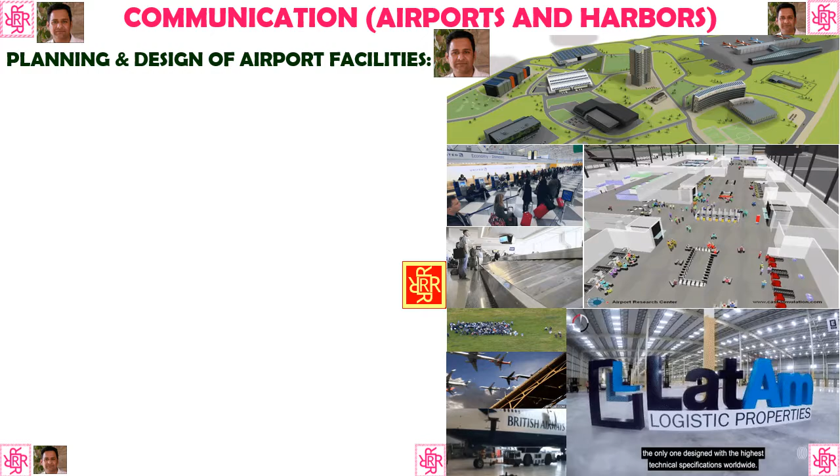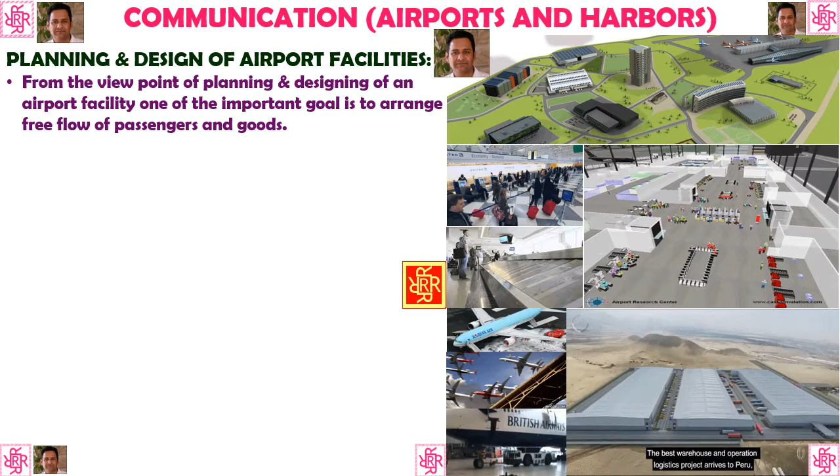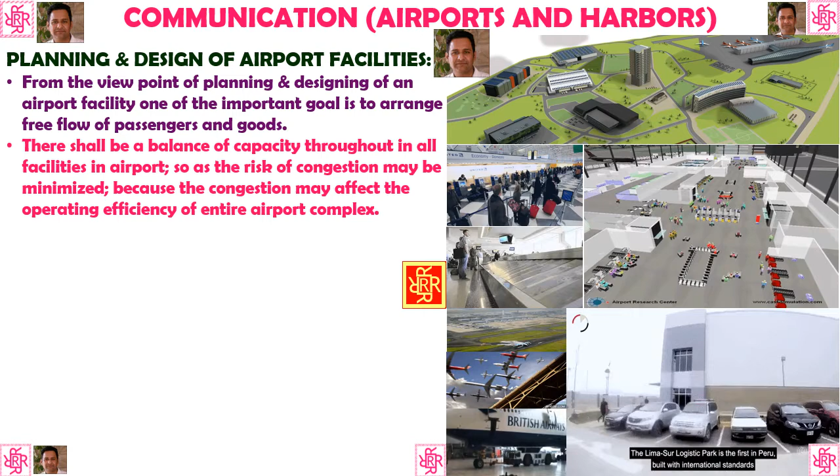Planning and design of airport facilities, how an airport is designed. From the viewpoint of planning and designing an airport facility, one of the important goals is to arrange the free flow of passengers and goods. There shall be a balance of capacity throughout all facilities in the airport, so that the risk of congestion may be minimized, because congestion may affect the operating efficiency of the entire airport complex. There are two types of functional areas within an airport: operational areas, known as airside areas, and terminal areas, or landside areas.

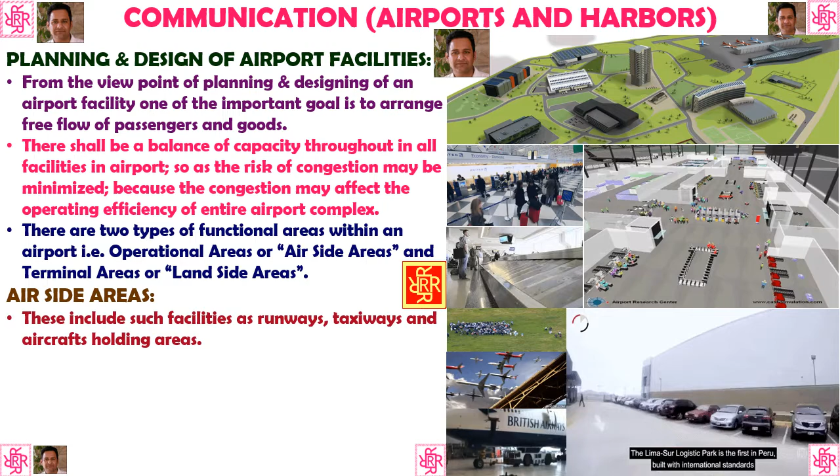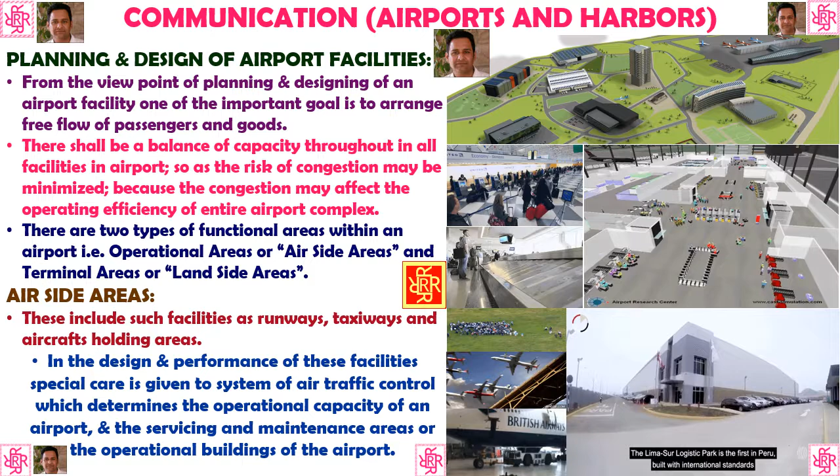What are airside areas? As we discussed in the previous figure, these include facilities such as runways, taxiways, and aircraft holding areas. In the design and performance of these facilities, special care is given to the system of air traffic control, which determines the operational capacity of an airport, and the servicing and maintenance areas or the operational buildings of the airport.

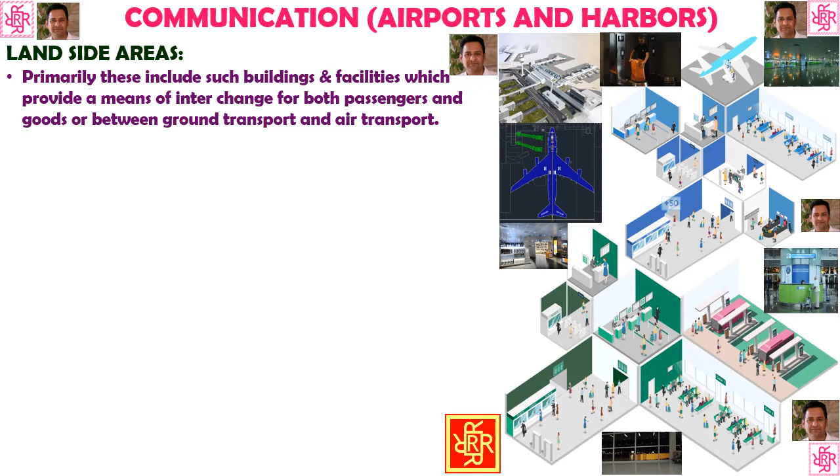Then come landside areas. Primarily, these include buildings and facilities which provide the means of interchange for both passengers and goods between ground transport and air transport. The design concept of landside areas evolved from simple low-capacity terminal buildings to high-capacity layouts, which are popularly termed finger terminals.

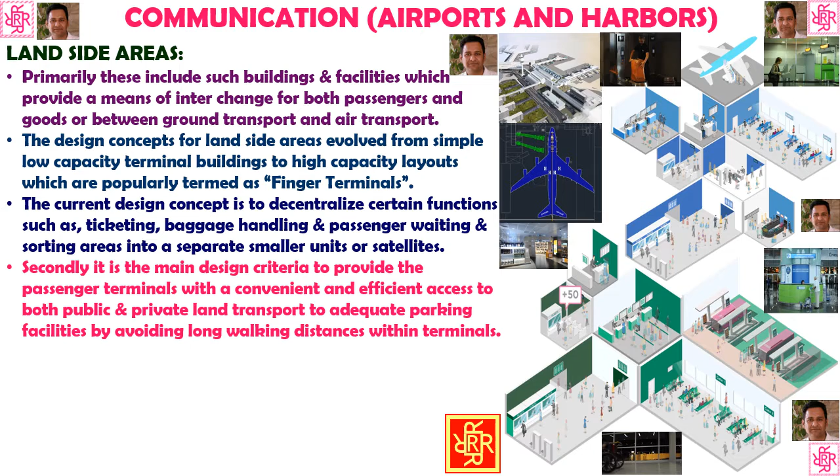The current design concept is to decentralize certain functions such as ticketing, baggage handling, and passenger waiting and sorting areas into separate smaller units, or the satellites. Secondly, it is the main design criteria to provide the passenger terminals with convenient and efficient access to both public and private land transport and to adequate parking facilities, by avoiding long walking distances within terminals.

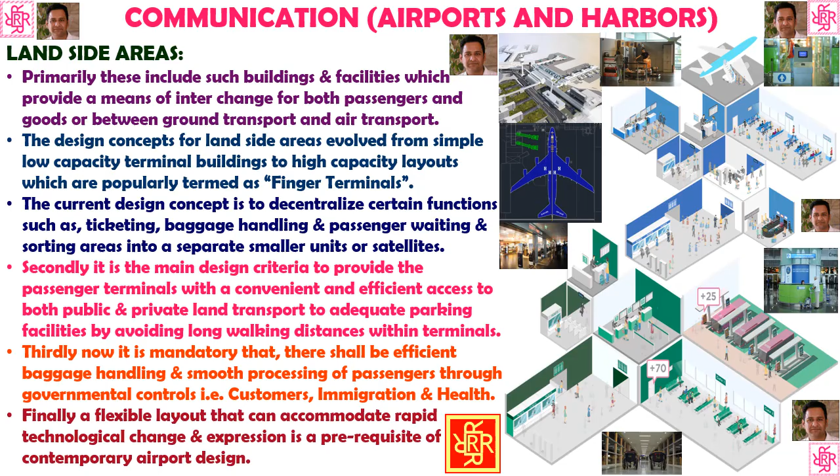Thirdly, it is now mandatory that there should be efficient baggage handling and smooth processing of passengers through governmental controls such as customs, immigration, and health. Finally, a flexible layout that can accommodate rapid technological change and expansion is a prerequisite of a contemporary airport design. After understanding the airport and its development, let's look at a small video of how an airport is developed in Vietnam.

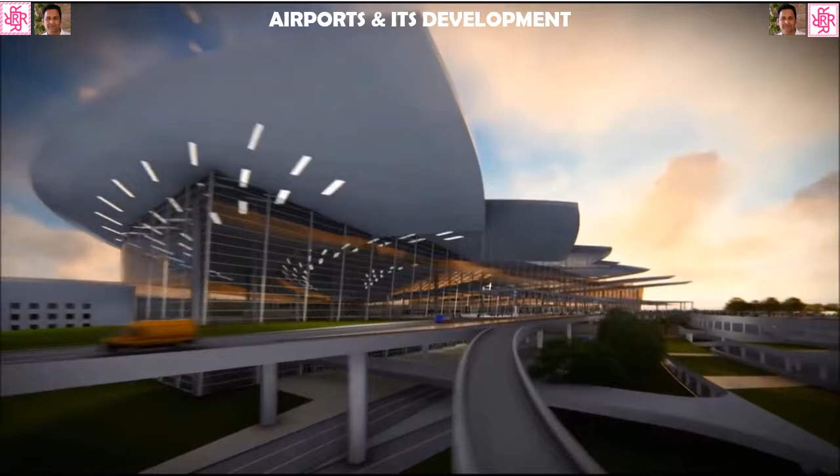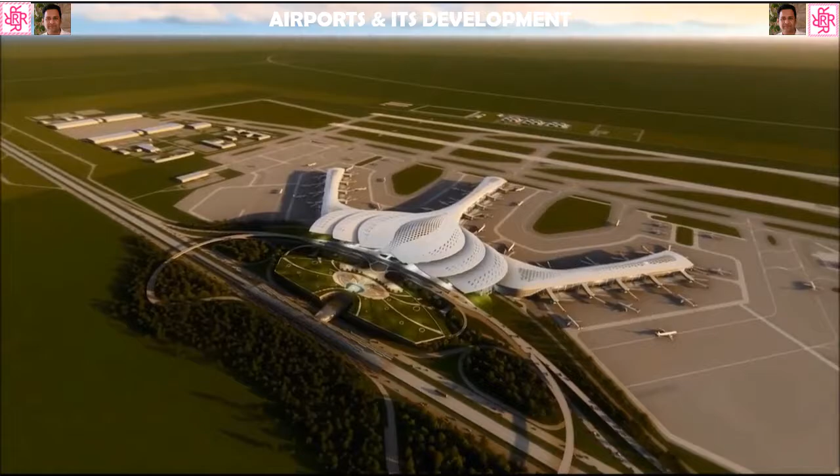This is the airport with landside areas, airside areas, and terminal building. This is the terminal building, and you can see the overall design of the airport. This is a green airport. Sustainability is the major feature of its design. Here you can see the overall 3D view of the airport and the connectivity of the road network with it.

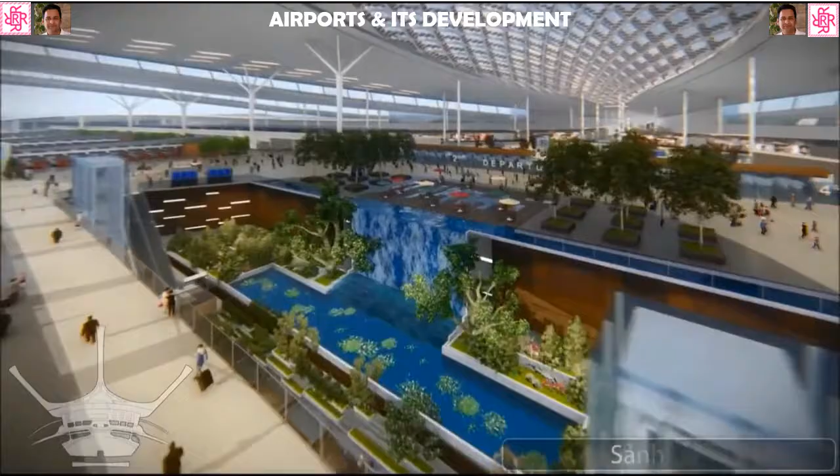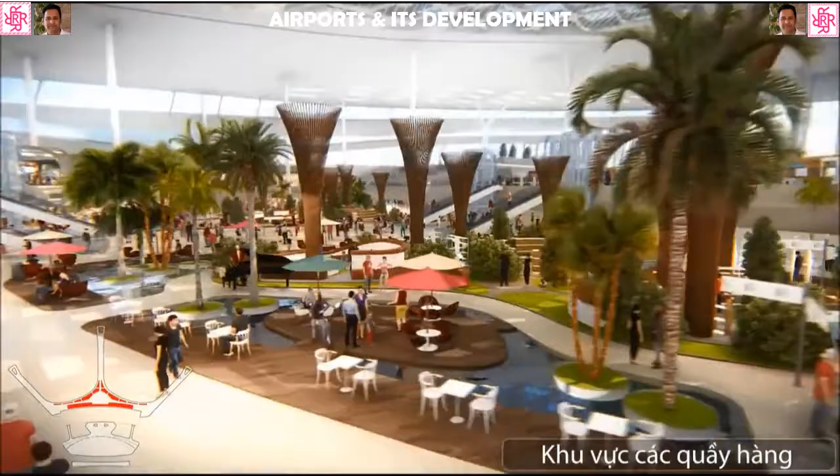Now let's look at the departure lounge developed and designed in this airport. This is where the passenger will arrive, and this is a very green space, beautifully looking, connected to the public transport. And here we are entering the departure lounge. On the left lower corner, you can see the plan of the airport and the areas which are being viewed in this video. You see the red color mark in the center. This is the area. So you can also look at the plan on the left side as it appears and the 3D areas which you are looking at.

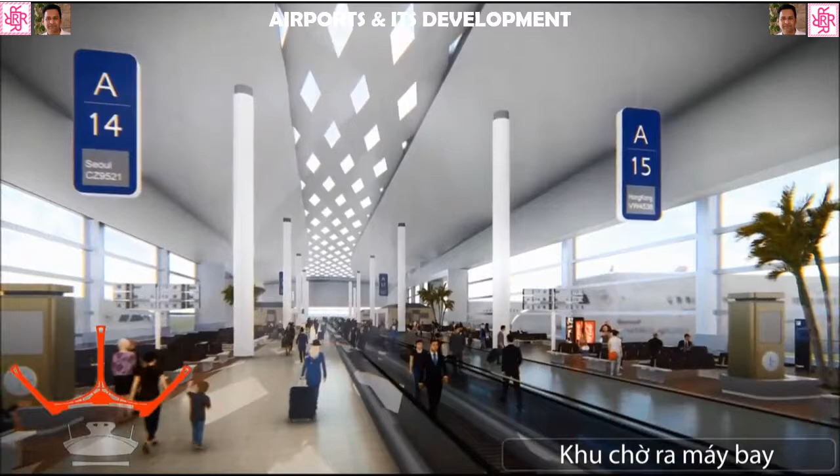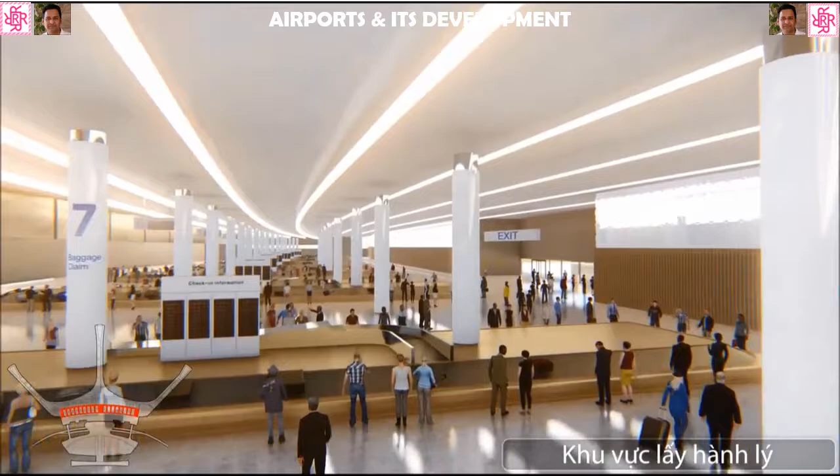This is the central lounge area for people sitting, eating, and other activities. So this is like a terminal building we are looking at. These are the wings of the airport which connect the passengers to the airside areas. Now we will look at the arrival. When the plane arrives, it is connected to this corridor and people just walk on these corridors, or there are conveyor belts, and then they reach this area, that is immigration. As soon as they come inside the immigration, they come to this area where they collect their goods and bags.

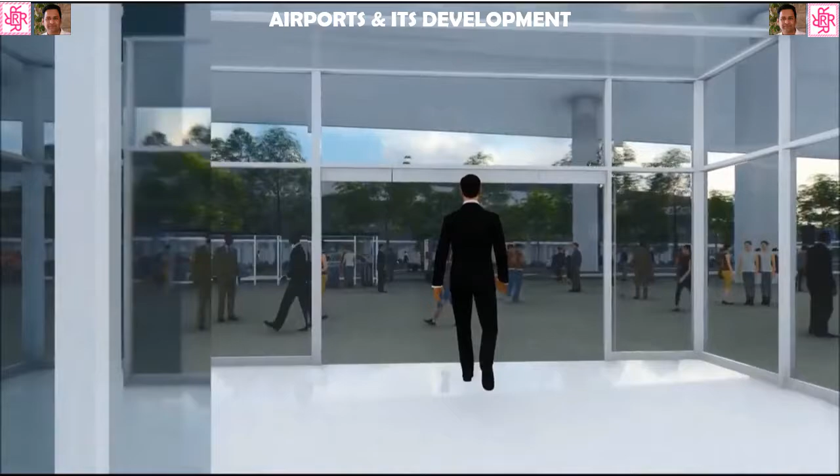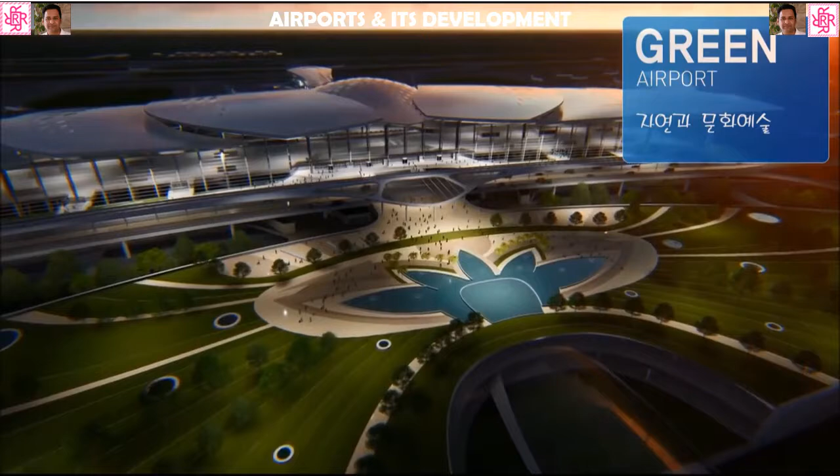Now there comes the central lounge where people can receive their passengers. You see there are open spaces also developed, and people have a very good environment within the airport. Now you come out of the airport. This is a green airport, or futuristic approach to airport design, with vast spaces organized in a sequence. This is the landscape, this is the airside areas, this is the terminal building, and this is the landside areas. So you see an overall futuristic airport.

Now let's talk about the waterways, seaports, harbors and docks. The economic planning of any region is based on the availability of commercial docks and harbors, because at micro scale it affects the land use of an urban area, and at macro scale the location of main urban centers depends upon it. What is the need of ports and harbors? Seaports are required to boost any economy, essentially for import and export of goods and due to increase in trade and commerce. Especially, there is an abject need of deep water berths and dry areas steadily increasing in size. Dead weight of the minimum ship is 45,000 tons. So we need these deep water berths and dry areas.

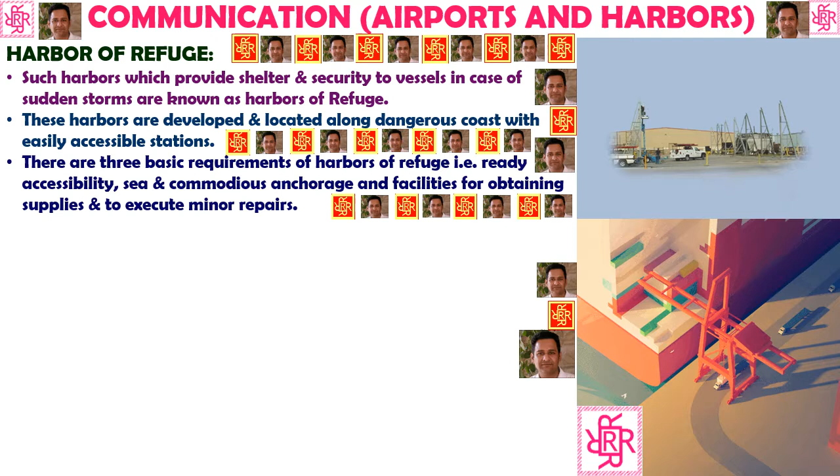Then there is the harbor of refuge. Such harbors which provide shelter and security to vessels in case of sudden storms are known as harbors of refuge. These harbors are developed and located along dangerous coasts with easily accessible stations. There are three basic requirements of a harbor of refuge. First, ready accessibility. Secondly, safe and commodious anchorage. And third, facilities for obtaining supplies and executing minor repairs of ships.

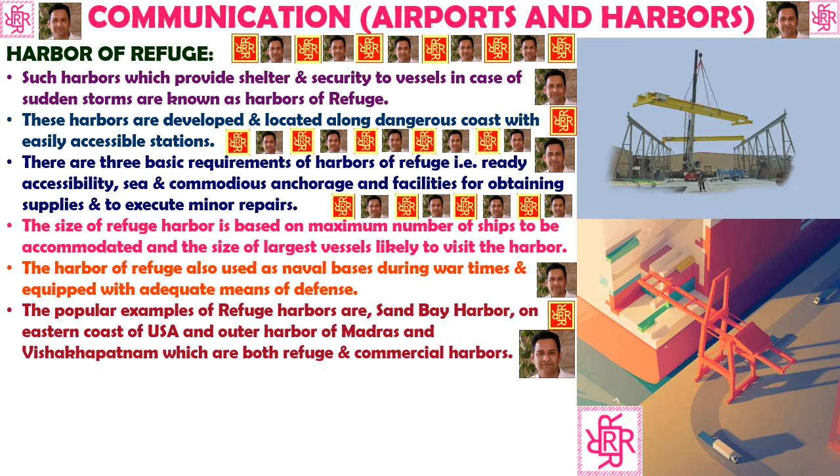The size of a refuge harbor is based on the maximum number of ships to be accommodated and the size of the largest vessels likely to visit the harbor. The harbor of refuge is also used as a naval base during war times and equipped with adequate means of defense. Popular examples of refuge harbors are Sand Bay Harbor on the eastern coast of the USA and the Outer Harbor of Madras and Vishakhapatnam, which are both refuge and commercial harbors.

Location classification. From the location viewpoint, harbors can be classified in four basic types. It includes sea or ocean harbor, river and estuary harbor, canal harbor, and lake harbor. What are the requirements and main features of a harbor? Let's look at it. Harbor requirements and main features. There are 6 basic requirements of harbors and 10 basic features.

The harbor requirements include easy access, adequate accommodation, safe anchorage, repair facilities, supply facilities such as jetties, berths, transit sheds, warehousing, cranes, hotels, banks, post offices, roads, and railways.

How does the planning and design of a harbour take place? There are four major factors or determinants of harbour provision in a city. These include need, economic justification, expected volume of commerce, and inland communication availability. A need of harbour primarily emerges due to military reasons, that is, a naval base or air base.

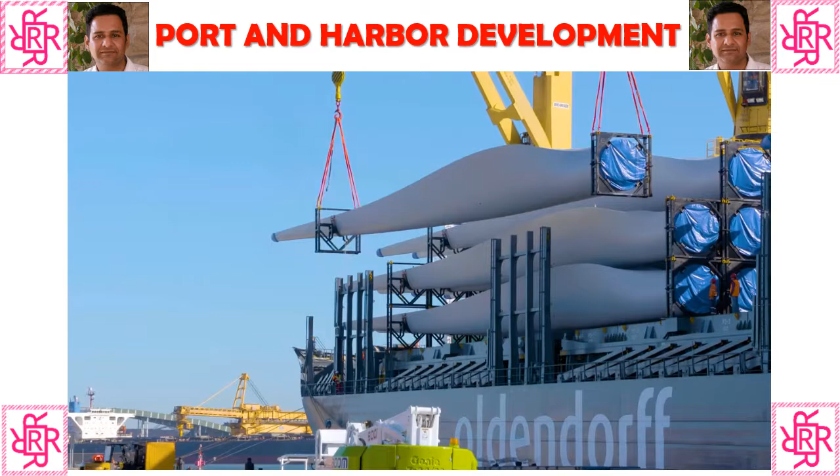The port's existing coal export trade, together with bulk commodities such as fuel and wheat, will continue to provide a stable foundation for our region. However, the Port of Newcastle has embarked on an ambitious diversification strategy that will leverage its natural advantages. Key projects include the Newcastle Container Terminal, the Newcastle Bulk Terminal, an automotive and ro-ro hub, the Maritime Precinct, and the Newcastle Cruise Terminal. These key projects are underpinned by 5 goals.

Promote the capacity of the port and the supply chain to support the economy. Utilise the existing road and rail transport assets to support the growing freight task. Grow, attract and facilitate new trades and supply chains. Support the development of new facilities to leverage investment and improve productivity. The port and its transport corridors operate 24 hours a day. Protecting the port land from urban encroachment is critical to efficient operations.

As the custodians of the port into the next century, we are committed to working with our partners, stakeholders and the community to ensure that the port can continue to grow its diverse trade base, deliver substantial port development and provide economic benefits to our region and Australia.

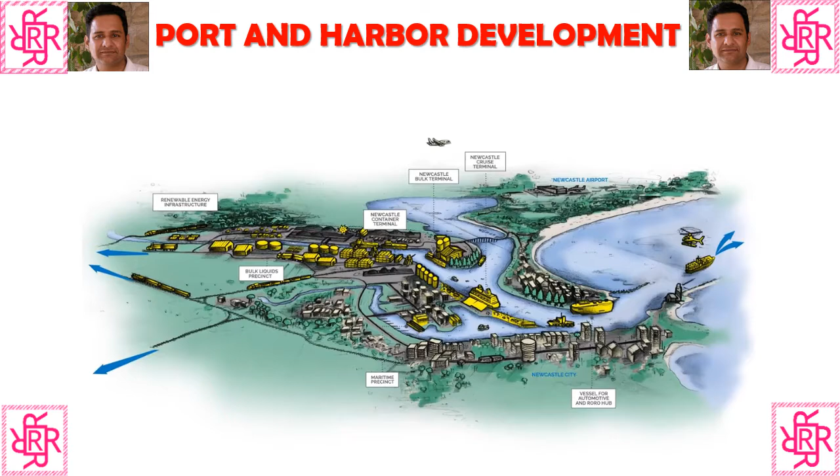So you have seen how the port and harbour development is taking place abroad. Now let's look at what is happening in our country, Pakistan. In Pakistan, the port and harbour development is taking place in Gwadar. So let's see this small case study about Gwadar. What's happening in Gwadar, Pakistan? A small fishing town in the southwest of Pakistan, Gwadar is the gateway city of China with a $62 billion economic corridor.

Gwadar is being developed under the model of China's Shenzhen through the establishment of special economic zones. Shenzhen grew from a population of 30,000 in 1979 to 10 million in 2017 with a GDP of $94 billion. Zhang Baozhong, the chairman of the China Overseas Port Holding Company, said China planned to spend $4.5 billion in Gwadar. In November 2016, the first cargo traveled the Silk Route from Kashgar in China to Gwadar. It then shipped out from Gwadar to the Middle East and Africa.

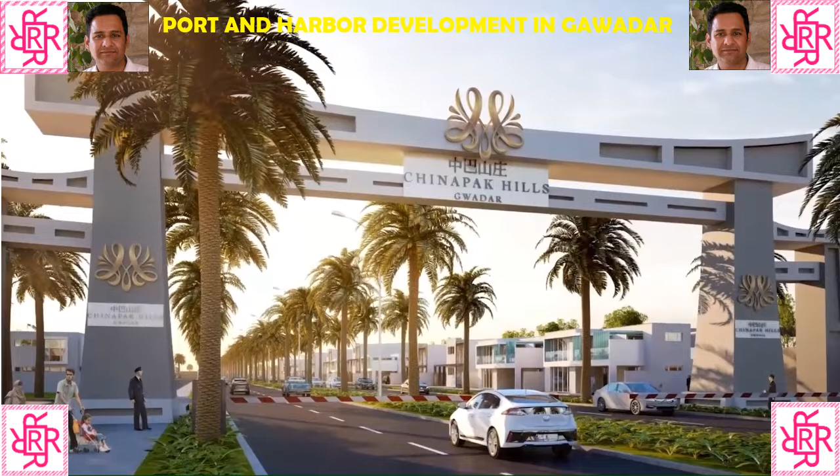Currently, there are some 2,000 Chinese personnel in Gwadar, and this number is projected to grow up to 500,000 by 2023. There is a geopolitical shift happening in the world, and Gwadar is at the heart of this. So you have seen how China is helping us in developing our port. The port city is developing, so there is town planning and there is port development, and they go together. I think with this case study, I end my lecture.